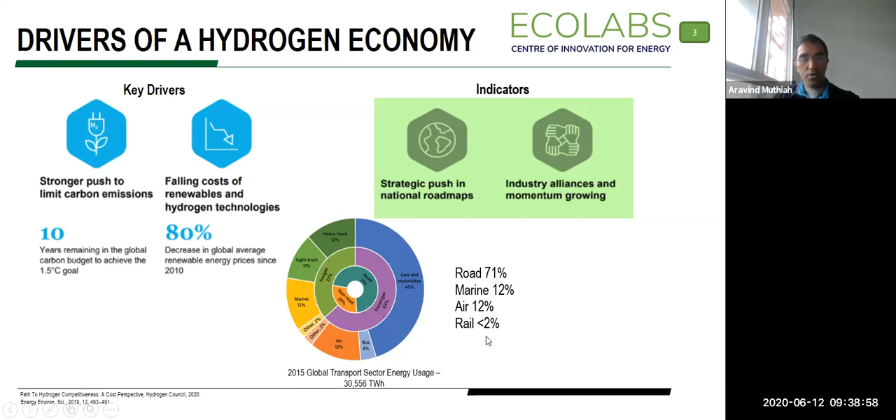The investment trends for the hydrogen sector have been quite erratic over the past few years. It hit around 250 million in the third quarter of 2019. This was a big influx of cash from CNH Industrial, which was looking to support a company called Nikola, which makes heavy-duty trucks powered by fuel cells. They have a unique business model of leasing out the trucks to their customers and running it as a service, maintaining and running the vehicle itself. So there was a huge cash injection of over 250 million by CNH Industrial, which is Italy-based, and that is what caused this spike.

But apart from that, there are a number of other players. Hydrogen Refuel Accelerator is quite popular; from the last round, it had funded around 6 companies in this sector. And we have Blue Ashva Capital within our own ranks, who are also looking to fund hydrogen-related technologies.

A number of these companies are corporate. CNH Industrial is corporate. Cummins, and Weichai from China, are also corporate. And we have Air Liquide, a major hydrogen producer, whose VC arm is also coming from the corporate side to fund a lot of these efforts. Primarily we think this is because of the huge capital involved and a lot of integration required to work with big players.

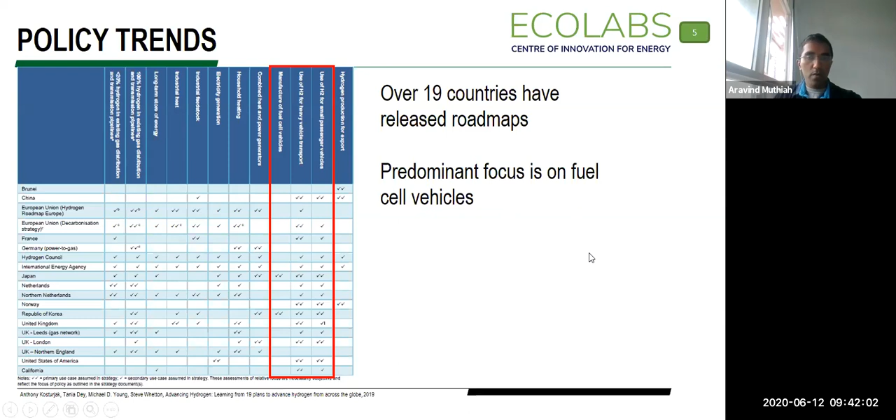In terms of patents, over the last 5 years, there have been a number of companies which have patented a lot of technologies under the fuel cell tag. Around 40,000 of those patent results were obtained. But the top 6 of these patents were filed primarily by Japanese-based companies, here Toyota, Honda, and Nippon, and also Chinese universities. So surprisingly, there was not a lot of Chinese companies involved, showing that Chinese universities are leading the effort in fuel cell innovation and translation. There is, of course, one Korean company as well.

So now we dive into each particular sector and try to understand the trends that are governing them so far. First is the aviation sector. Here, by far, the adoption seems to be the least, mainly because of a lot of regulations and trials to be done before hydrogen can be adopted fully.

On the maritime side, there is a lot more impact. So the first table we have here shows the difference between internal combustion engines, fuel cells, as well as other forms of powering a boat. Now, today, the key technology that is viable is ammonia. The closest in terms of low carbon is ammonia with an ICE engine. However, LNG is the most preferred right now, along with VLSFO. Now, as we go long term, that's where fuel cell starts playing a major role.

And as you can see here, the key cost for fuel cell powered boats is the cost of delivering hydrogen or ammonia, whichever form the fuel is in. It takes up at least 50% of the total cost of ownership while running that particular boat. And that is one of the key areas where if there is a focus to drive down these prices, there would be a greater impact.

In terms of the storage of hydrogen itself for fuel cell powered boats, the percentage is quite low. So that is not a critical driver in terms of a high cost. Similarly, when it comes to the fuel cell, it barely occupies less than 5% of the entire cost, 5 to 10%. So the key driver to making these sort of boats viable is to drive down the cost of delivering hydrogen or ammonia.

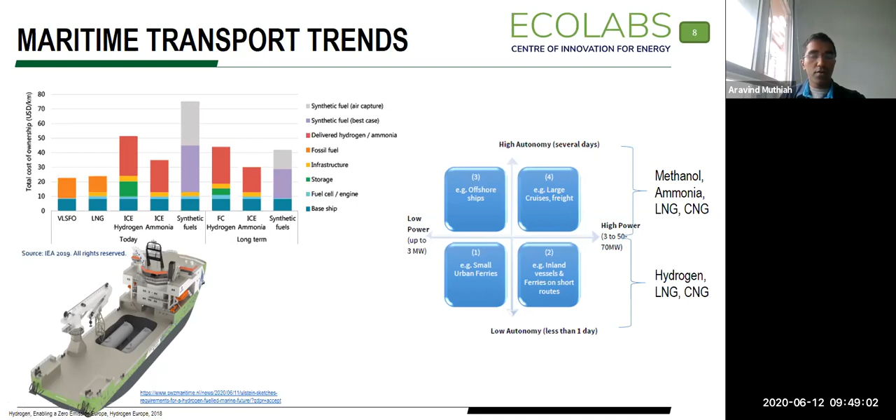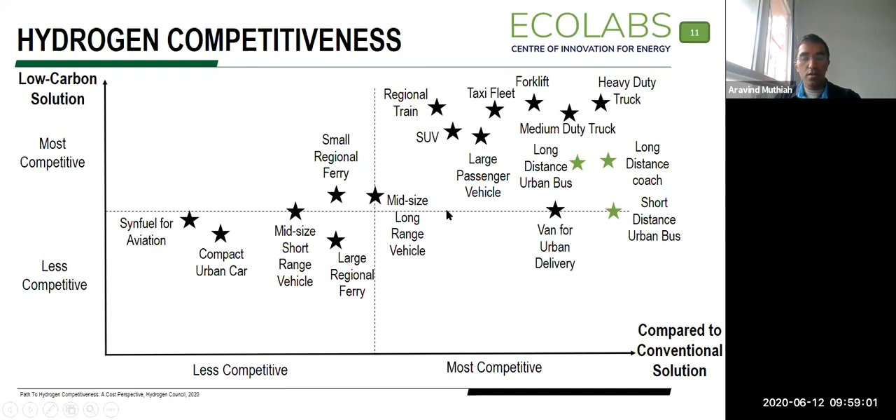When it comes to aviation, you can see it's quite far on the left, and that's where the push still requires a lot more time before hydrogen and fuel cells can be fully viable. So now let's focus on this particular sector, where we are looking at road transport vehicles and those which are immediately viable and how they compare to battery electric vehicles.

So the chart here shows the timeline again for these particular vehicles. The earliest vehicles that can be realized are in the 2020 to 2025 range, and they are the urban buses, the small ferry, and the heavy duty trucks. When it comes to other vehicles such as aviation and the large ferry, we'll have to wait a bit longer, 2030 and beyond.

Now, when we look at the two main vehicles from the road transport side, heavy duty trucks as well as large passenger vehicles, these are the highest quantity on the road. The split of how much goes into this total cost of ownership is provided here. There are four main drivers which contribute to the cost of a hydrogen vehicle. The first is the hydrogen production, where it gets its hydrogen from. The second is the hydrogen distribution. The third is the equipment capex, so that is the vehicle and its fuel cell. And then the fourth is the OPEX.

So as you can see, for heavy duty trucks, the key driver is the hydrogen production. It takes about 40% of your total cost, while distribution is the next segment. So Nikola's model of leasing out their solution is mainly to cover this kind of cost, where they produce the hydrogen on their own, and they set up distribution networks for their own hydrogen fuel cell powered trucks. So they're hoping to drive down costs here so that they can make a profit. While if the focus is purely on the fuel cell, which constitutes only roughly around 30% of the total cost, the impact is not as much.

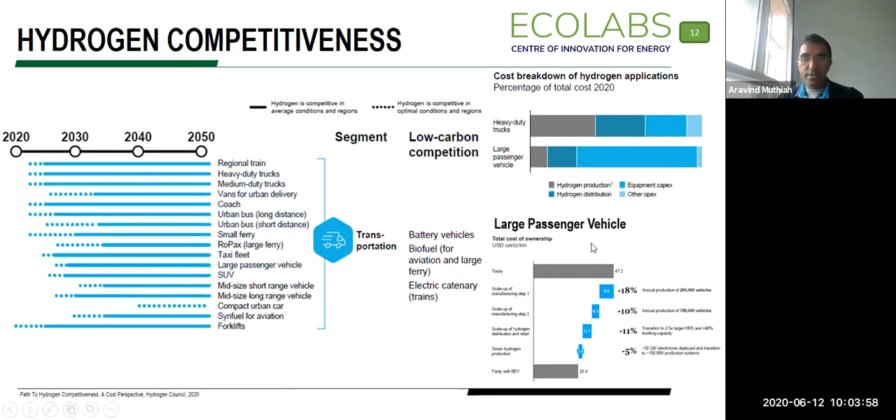The third is transitioning to larger hydrogen refueling stations. So HRS stands for that. And this in turn would mean that a particular asset in the form of a hydrogen refueling point would be used by multiple vehicles. So that spreads out the cost and therefore reduces the cost on this side. And finally, the last way to reduce is on how you're producing your hydrogen. This is on electrolysis, making improvements in technology, as well as scaling it up, producing through renewables. So that's where electrolysis of water to produce hydrogen would drive down the costs by 5% here, and therefore provide the total reduction required for fuel cell vehicles on the passenger segment to compete with battery electric vehicles.

Now, across different vehicle segments, you have different sort of total cost of ownership or price of hydrogen per kg. Now, what has been observed is when this cost of hydrogen being provided to a vehicle at the nozzle, so this is the pump at which the vehicle is being refueled, when that price of hydrogen is between 4 to 6 USD per kg, that's where nearly 50% of use cases of land-based transport can start adopting hydrogen.

Right now, with systems like natural gas, Nikola has been able to push down costs to around 2 USD per kg. So that's where they have a huge advantage and are able to easily cater to this heavy duty and medium duty segment. So as seen in this chart, the key vehicles that will break through first are the heavy duty, medium duty, and long range vehicles. These are the ones where even a higher cost of hydrogen makes sense in moving people around.

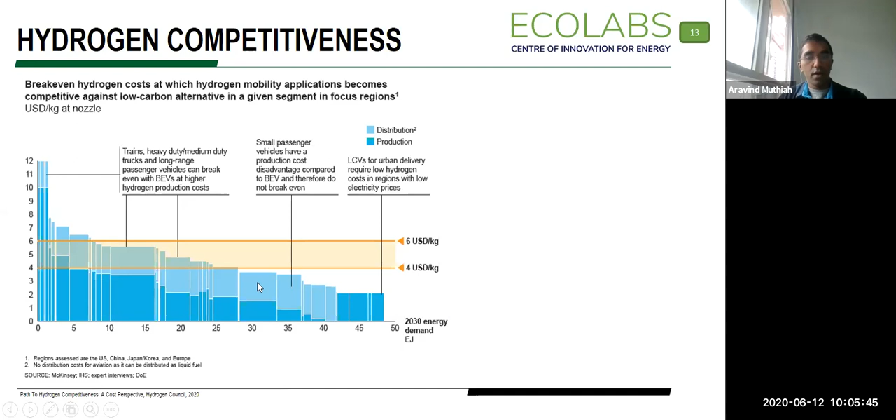Smaller vehicles require around 3 USD or lower. So when Elon Musk says fuel cells are basically fool cells, it is mainly coming from the perspective of a small passenger vehicle. But when it comes to larger vehicles, it seems to make sense to switch to hydrogen when this sort of price point is reached.

Now, when we look at the hydrogen technology for powering any vehicle, the core technology that is required is a fuel cell. And the value chain of that is important to understand when either any startup is looking to get into the space or an investor is looking to place some money. So the value chain consists of 5 segments. First is the fuel itself, mainly the fuel type. Second is the fuel processor. This is basically your fuel cell.

So one key difference that needs to be noted between a fuel cell and a battery is a battery stores as well as converts energy, meaning it stores energy in a chemical form and then converts it to electrical form when needed. A fuel cell is different. It doesn't store energy. It only converts whatever fuel is provided to electricity. So the fuel processor here refers to the fuel cell.

The third is how you group these fuel cells together to build a stack. The fourth part is assembling a stack together for a particular application, and then finally deploying that application in the form of a vehicle. So I'll get into this one by one. So on the fuel side, we have broadly 6 different types of fuels: hydrogen itself, different types of alcohols, the most preferred being methanol, natural gas, ammonia, gasoline, and diesel. Each one of these would work differently with different types of fuel cell. So it's important to choose the fuel cell based on the sort of fuel that is intended to be used.

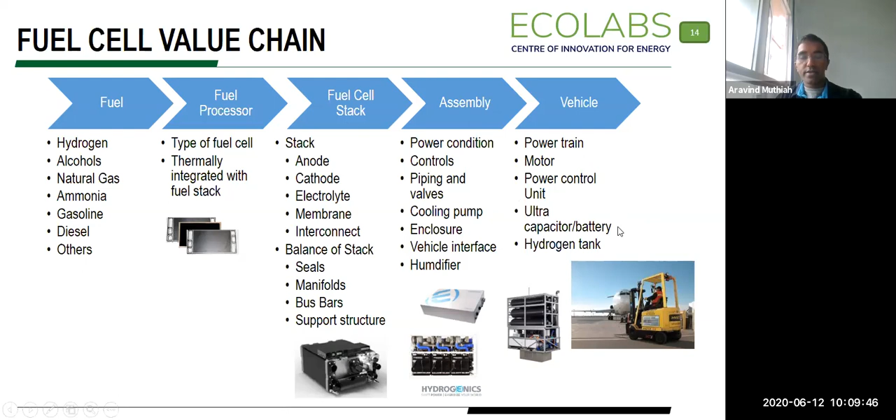Now, in a passenger vehicle, I had mentioned earlier that the key driver of the high cost of a hydrogen-powered system is the fuel cell, or the capex for the fuel cell. So this entire system would be of core focus for a passenger vehicle, while for a hydrogen fleet of trucks, heavy-duty vehicles, it's not necessarily focused on this, but more on production and distribution of hydrogen.

So now we look at the different types of fuel cells that are available. There are mainly six main types. You have the PEMFC, which is the polymer electrolyte membrane fuel cell, which is the most common. And then the alkaline fuel cell, phosphoric acid, molten carbonate, solid oxide, and direct methanol. So there are a number of applications for each one of these fuel cells, like different types of batteries can go into different types of applications.

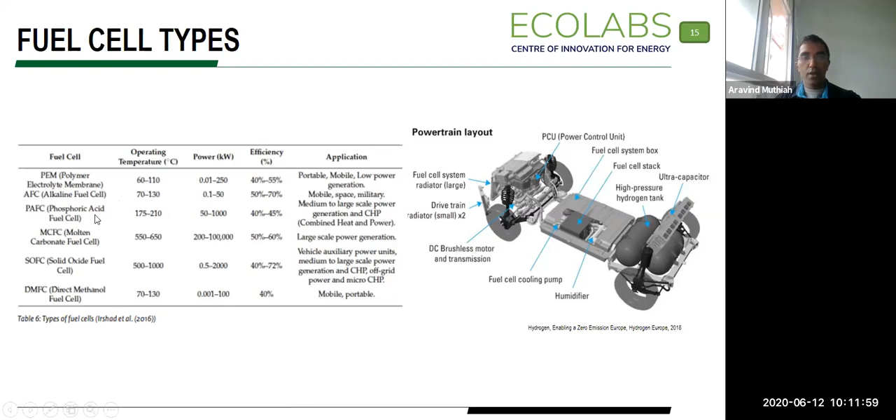Now, these fuel cells need to be compared with the existing incumbents. What we have right now is lithium ion leading the pack. It went through the Gartner hype cycle, where in the 1970s it was hyped up to be one of the most portable energy storage solutions, primarily made by Exxon. But only now are we seeing its full realization. So that's a good 40 years or so.

Now, when it comes to fuel cells, they gained attention around the 1980s, 90s in a big way. There was a hype then. But what we see now is a move towards a more mature solution, where standards are coming into place and these fuel cells are being more sought after. It's also being driven by two of the factors mentioned at the start of this webinar, the lower carbon emissions, as well as the energy requirements that are needed for these vehicles.

So when compared to the other types of batteries available, lithium sulfur, redox flow, sodium ion, magnesium ion, right now fuel cells seem to be the best bet. In terms of lithium air, we are still in the process of plotting which exact fuel cell would be better than lithium air and which would be worse off in the maturity scale. And we will keep our partners updated as we plot the different fuel cells. But essentially, we see that fuel cells have reached a point of maturity and are transitioning towards competing with lithium ion.

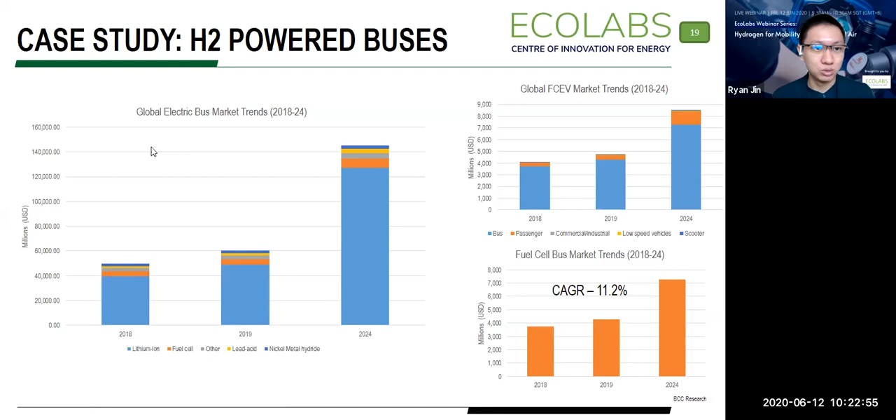Okay. Can hydrogen be used as an energy source in other sectors other than transport, such as manufacturing or buildings? Yes, predominantly hydrogen has three use cases. One is in industry, the second is in building systems, and the third is transport.

The reason we are focusing on transport here is, as I showed in one of the earlier roadmap slides, most of the countries would like to develop a hydrogen economy for transport first, before adapting it to different other use cases. So this means that that's where the technology is needed first, and that's why I've dwelt on that. But at a later date, maybe we can address the buildings as well as industry side.

All right, we have a hand raised. Naku, would you like to unmute yourself and ask the question? Okay. Hello, can you hear me? Your voice is low as well. Yeah. Can you speak a bit louder? How about this? Louder, louder. Okay. Can anyone hear me now? Yeah, we can hear you, but your voice is low. But please go ahead. No problem. Okay. I'll just power through.

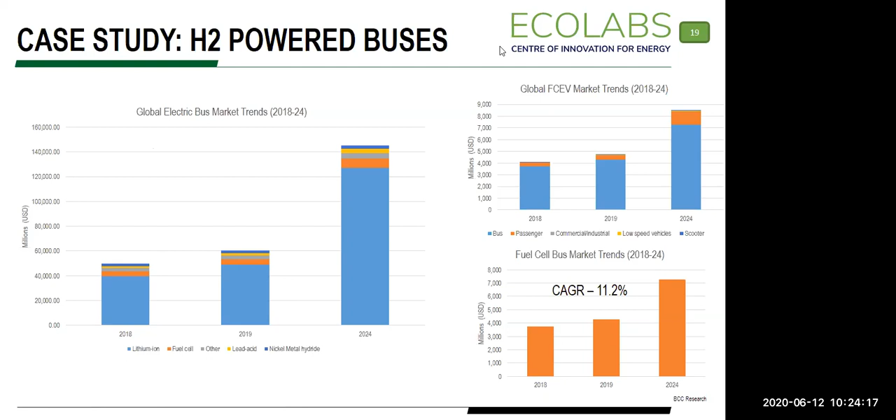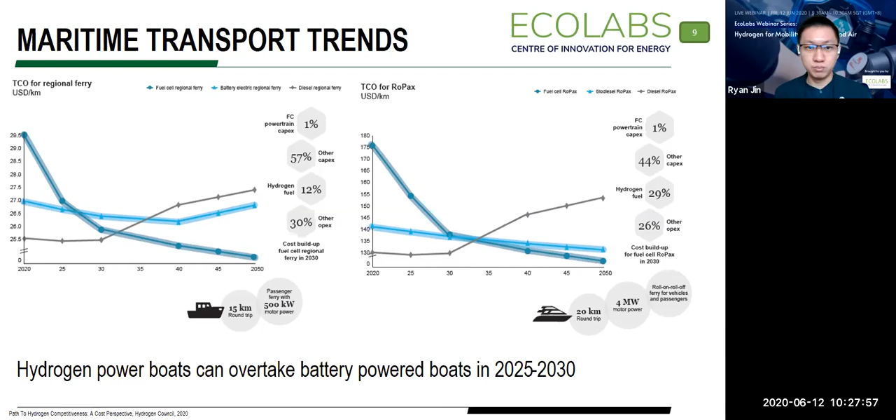Right, thank you so much. Aravind, I believe we have a few more questions, but may I suggest that you run through the case study first before we jump back to the questions. Okay, sure. I can run through that first and get back to this.

So, these are a final set of slides on the case study itself, and just to refresh your memory on one of the slides where I had portrayed the different vehicles in terms of maturity, in terms of carbon emissions versus conventional fuels. We noticed that the buses were on the top right part of the quadrant, and the reason they were there is what I'm going to delve into right now. So hydrogen-powered buses fall under the electric bus category, but there are multiple ways of powering an electric bus. That's what the first plot here shows.

You have lithium-ion, fuel cell, lead acid, nickel metal hydride, and other forms. As you can see, right now in 2018, 2019, the core focus has been on lithium-ion, and they take up more than 75% of the market share.

So in terms of fuel cell, it's still not yet deployed in a big way. However, fuel cells can be used to power buses, cars, commercial or industrial vehicles, low-speed vehicles, scooters, and a number of these types. Under that category, we can see a steady growth of fuel cell-powered vehicles, going from $4 billion USD worth of market to almost doubling by 2024. That's the expectation we have.

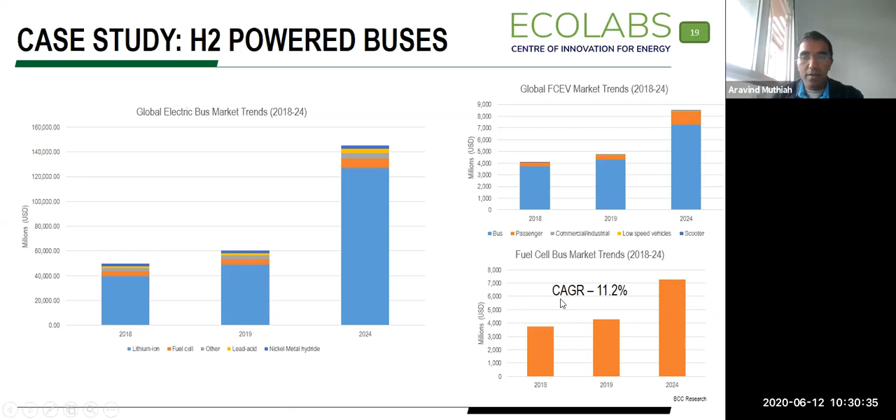Now in the buses segment, there are three main types. You have the urban short distance — basically what we see in Singapore, like the NTU area, 199, 179, those kind of buses. Then you have the long distance buses, basically shuttling from, say, Bedok to Jurong West. And the third type is the long haul coach, which is basically Singapore to Malaysia or Singapore to Kuala Lumpur. Each of these buses has a different curve and a different set of requirements.

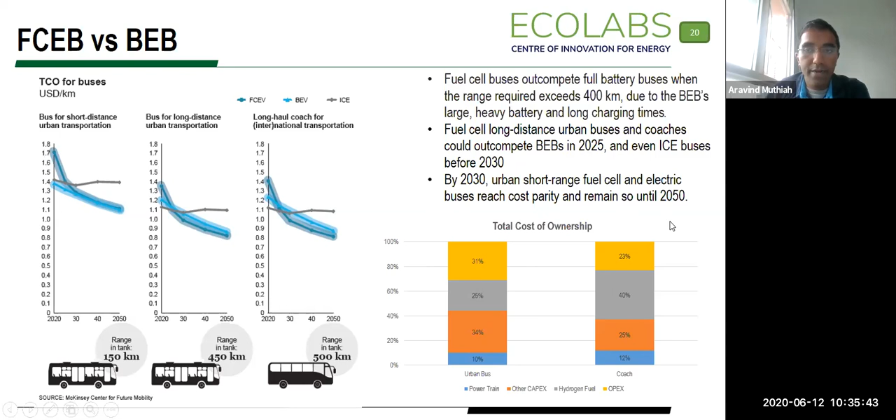The fuel, as well as other operational costs - so the key three takeaways here are: first, full battery buses would be outcompeted by fuel cell buses for urban long haul by 2025, and for long distance urban by probably 2030. For short range, it does not seem to outcompete, and electric seems to be the preferred form of transport till 2050.

Now, what do I mean by modification of the electricity grid? This is something we faced in Singapore, and we are going to face again in the near future. In Singapore, each bus depot has around 300 to 500 buses, so as each of these buses charges, they are going to draw power at the same time.

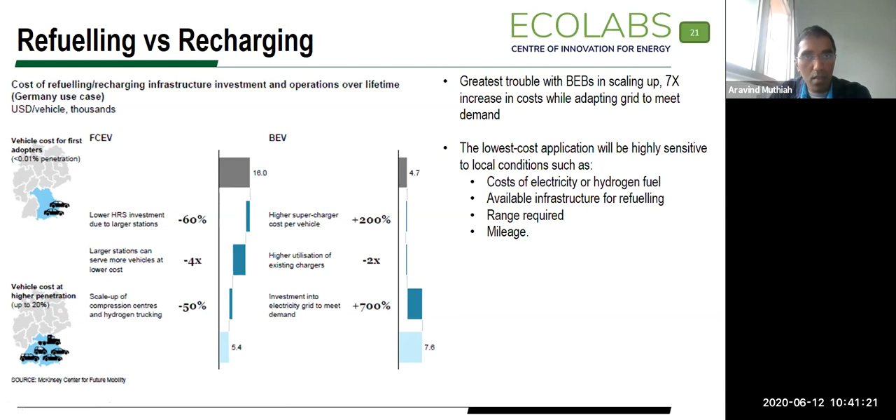So just to sum up, the key takeaways from this talk are threefold. Expect to see hydrogen-based buses and heavy-duty vehicles, mainly forklifts and trucks, within the next 5 years. This is not too far out, and this will most definitely outcompete battery-powered vehicles. The second is the charging infrastructure of battery-powered vehicles is the greatest impediment. As I showed earlier, it's a 7x increase that comes later down the line and can disrupt a lot of economics.

And the third key takeaway is on the maritime sector. Expect to see 2025 to 2030 being the point when smaller ships are deployed, primarily ferries, and then there would be a scale up for bigger ships. Okay, thank you so much. I'm open to questions, and yeah, please feel free to ask any doubts you may have.